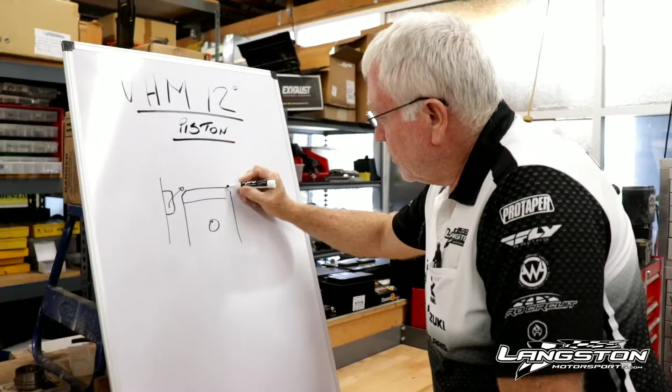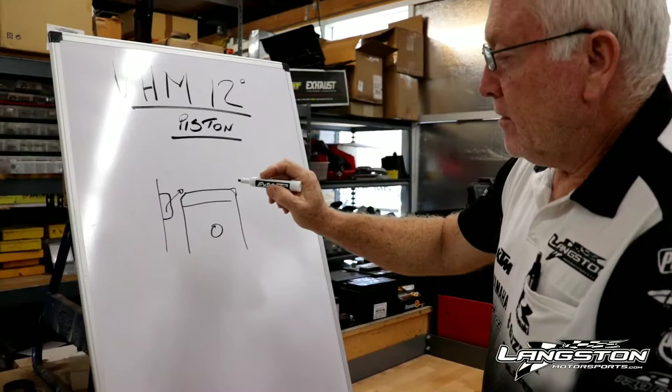I'm not a very good artist, but I'll try and illustrate here so you get a better understanding. Basically, a stock piston would come like that. The 12 degree piston has a small little 12 degree angle all around it. In a nutshell, what it's doing is it's giving you a longer port duration, because as this piston goes up, where with a standard piston your port would be closed, now you're still open until there.

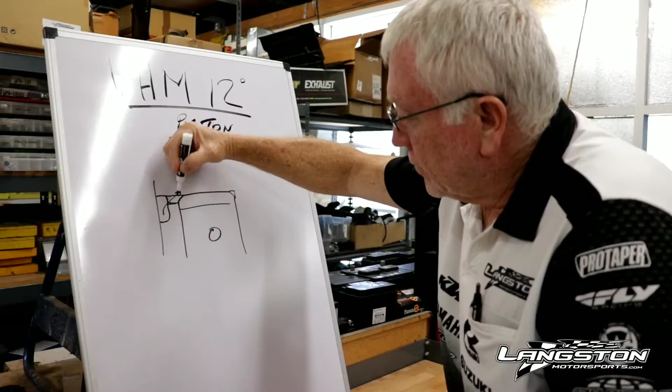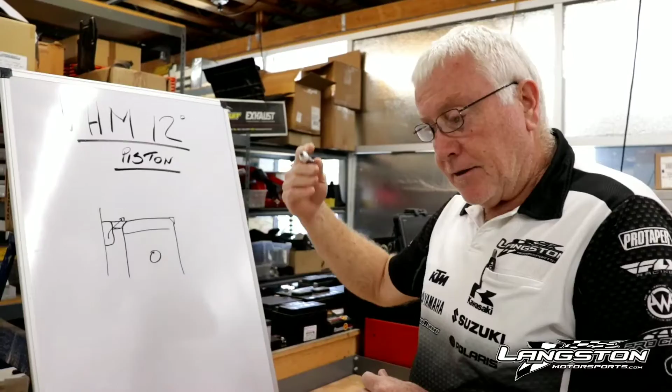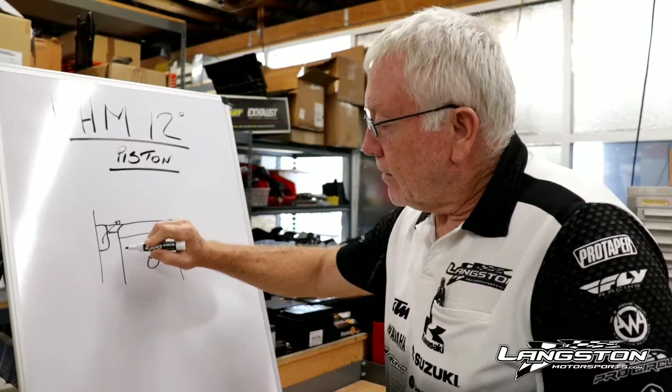And the same happens in reverse. So when you're opening the ports earlier, you're closing the ports later. This also helps with the exhaust port as well, getting the burnt gases out. The 12 degree piston allows better flow, because now your charge is not taking a 90 degree angle, it's taking more of a smooth angle into the head.

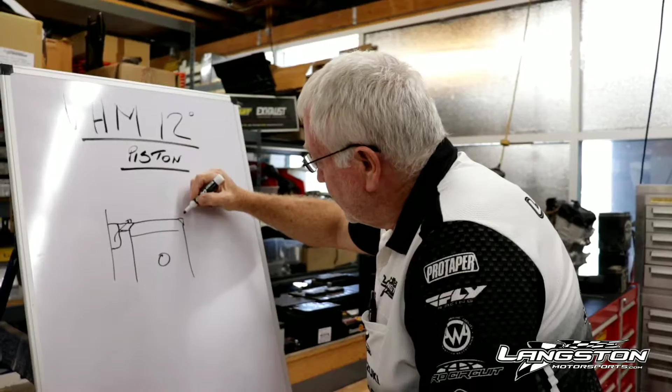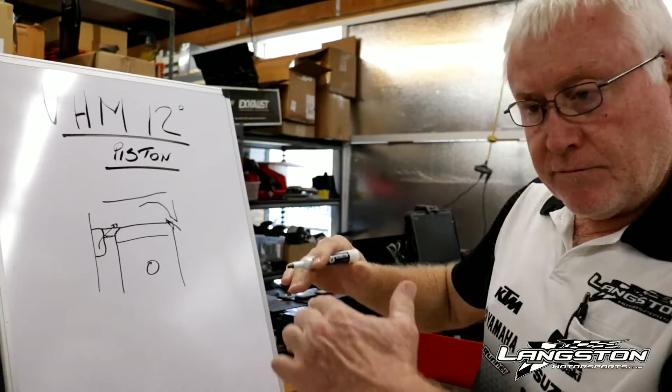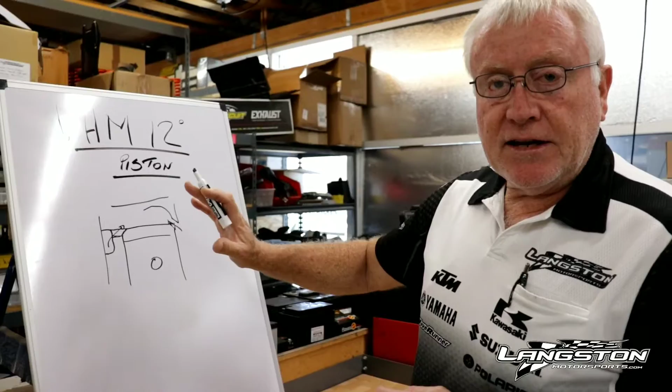You have to use the 12 degree piston with the VHM head, because the VHM head also has the 12 degree angle here, so your flow will flow in better. So you're going to get more flow, a longer duration, you're going to get more over rev. The head is specifically designed to put the compression back in, so you're not losing any compression. You're just getting a better revving engine, and a better flow of fuel coming in and out of the engine.

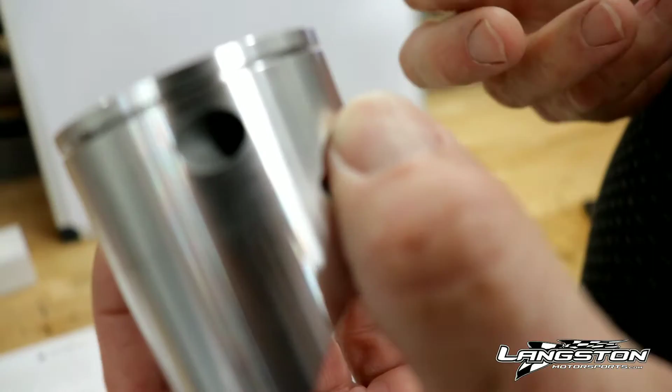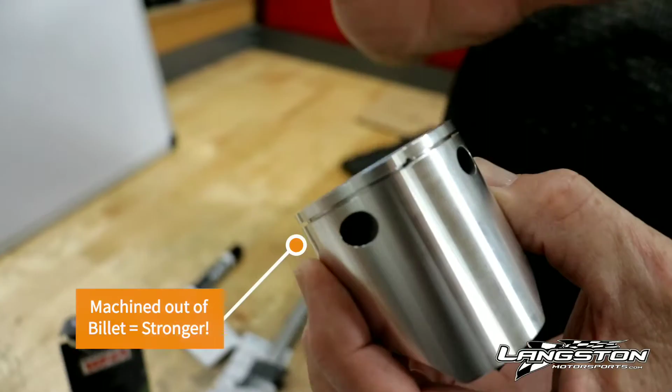Today we're going to be talking about our second part of the 12 degree VHM piston. I'm going to go a little more in depth about the piston itself. Now, the piston is machined out of solid billet. Most pistons out there are usually forged, which means it's sort of cast and then hammered to get the density in it. There is nothing stronger than machining out of billet. You've heard people advertising this is machined out of billet. This is one of the few pistons that I know of that's machined out of solid billet.

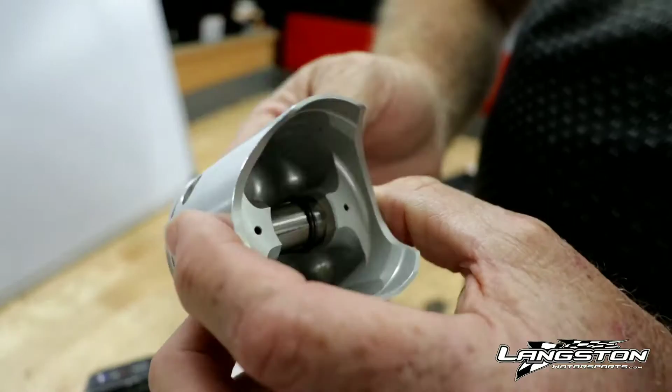Obviously it's going to be very, very strong, which is going to make it detonation resistant. What they've also done is they've put a thermal heat coating on the inside, if you can look closely with the camera. What that does, it stops the heat from the combustion chamber transferring through and heating the charge in the crankcase.

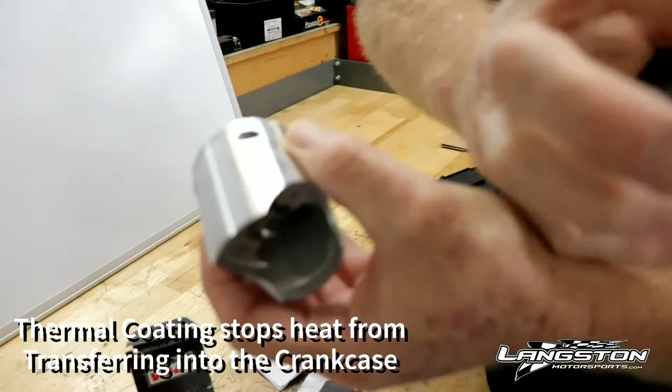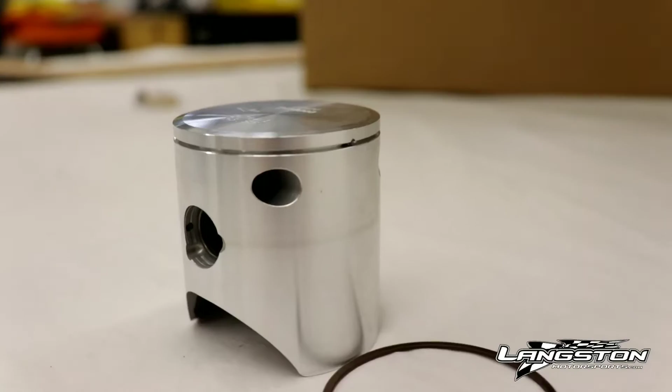Now, you've heard of turbochargers having intercoolers. The intercooler cools the charge down. The cooler your intake charge is, the more you can get in. So this stops heat transferring into the crankcase where your charge is waiting to come through the ports into the top. The piston, like we said before, is a 12 degree angle. It's very small here, but it makes a big difference in performance.

Okay, so another huge benefit about the VHM piston, whether it's a 12 degree piston or just a stock piston that you're choosing to go with, VHM have a Takisawa piston lathe. What that allows it to do is machine elliptically. The benefit of that is the exhaust port side of the piston is going to get hotter, so they make this a little narrower than that. So when this expands with the heat, you don't get heat seizures on the exhaust port.

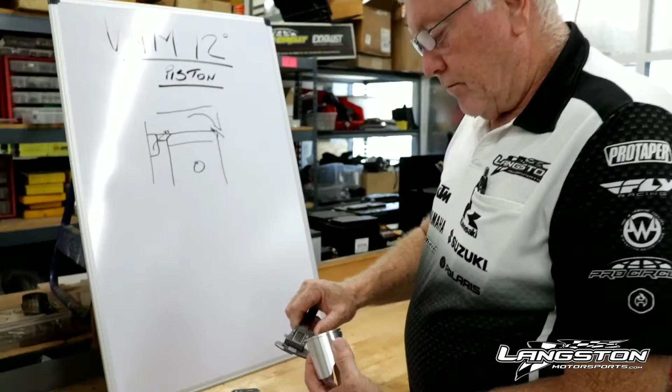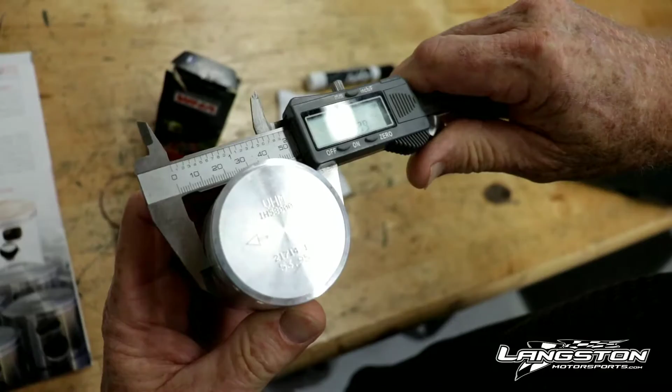I'm sure every two-stroke owner has experienced that somewhere along the line, where the piston gets so hot on the exhaust port that it seizes. So this helps eradicate that. Now I'll show you here on a vernier caliper. Let's just zero it out. If we go across the exhaust, 53.79, and if we go side to side, 53.77. So again, it's not huge, it's just enough to not eradicate, but reduce the risk of seizure.